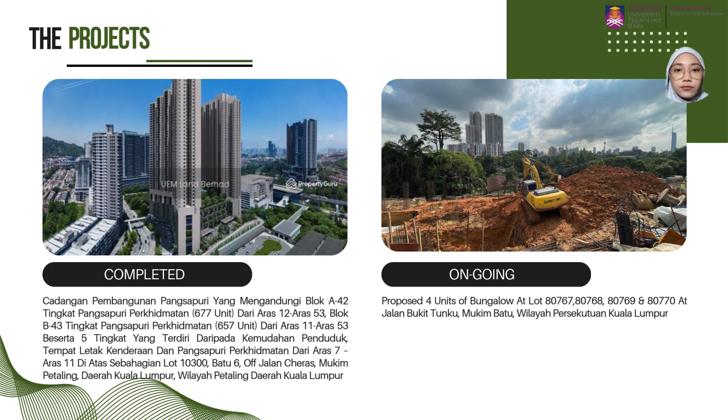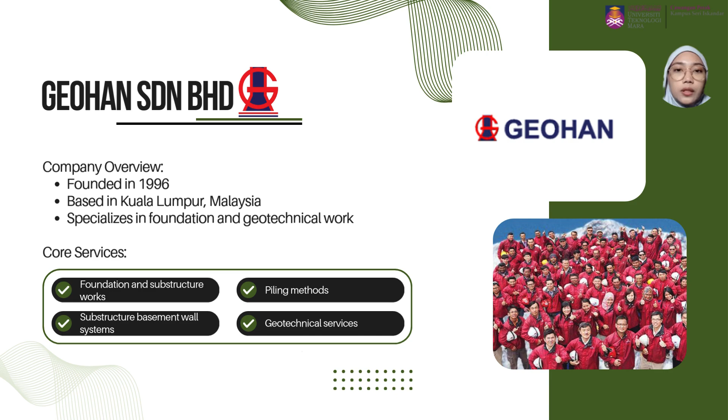Geohan Sdn Bhd was established in 1996 and is based in Kuala Lumpur, Malaysia. The company specializes in foundation and substructure works, including piling methods and basement wall systems. Their expertise lies in solving problems related to soil and ground stability, which is essential for safe and long-lasting buildings. Over the years, Geohan has completed various projects that demonstrate their technical capabilities and commitment to quality.

Let me share a recent completed project, the CTC Plot 1 project in Cheras, with a total contract sum for piling costing 39 million ringgit Malaysia. This project features two high-rise apartment blocks, Block A with 42 stories and Block B with 43 stories, both blocks offering 1,334 residential units. The unit size ranges from 42 meter square to 118 meter square, catering to different customers' needs. The development also includes 5 levels for parking, amenities and services apartment, making it a modern and convenient living space. The project was completed in 2024, designed to provide urban residents easy access to infrastructure and lifestyle facilities like MRT.

These are the parties involved in the CTC project. Geohan Sdn Bhd is the foundation and geotechnical specialist. They handled all piling and substructure works, ensuring the building's stability and durability. YHSA Sdn Bhd, as the architects, was responsible for designing a modern, functional layout suited to urban living. UEM Land Berhad, as the developers, oversaw the project's financial and operational aspects, aligning it with market demand. Local authorities ensure compliance with Kuala Lumpur's building regulations, especially given the urban location.

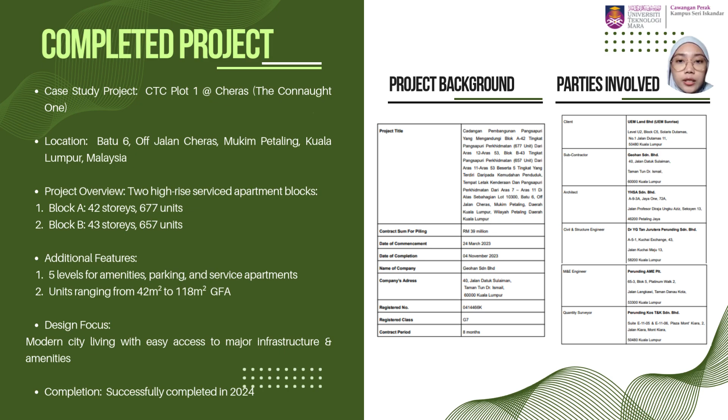Now, let's take a look at an ongoing project constructing 4 luxury villas in Bukit Tunku, with the total contract sum for piling costing 3.5 million ringgit Malaysia, one of Kuala Lumpur's most exclusive neighborhoods. This project is challenging because of the specific soil conditions at the site. Piling is crucial here to ensure the houses are built on a stable foundation. To address this, the team conducted a detailed site visit to gather data and develop appropriate solutions.

The parties involved in this project: Geohan Sdn Bhd conducted the piling work using their expertise to adapt to the challenging soil conditions. Technical CSG Engineering Consultants Sdn Bhd, as the structural engineers, designed a strong and stable framework to support the villa. Lee Chor Wah Architect focused on creating luxury designs to match the exclusivity of Bukit Tunku. Junuteras Vision Sdn Bhd, as the main contractor, oversees the construction, ensuring the use of high-quality materials and timely delivery. Local authorities monitored adherence to building codes and environmental guidelines.

Before I end my presentation, I would like to conclude that Geohan Sdn Bhd is a leader in foundation and geotechnical works, as shown by their completed project in Cheras and the ongoing Bukit Tunku project. Their innovative approach to piling ensures stability, safety, and efficiency in construction.

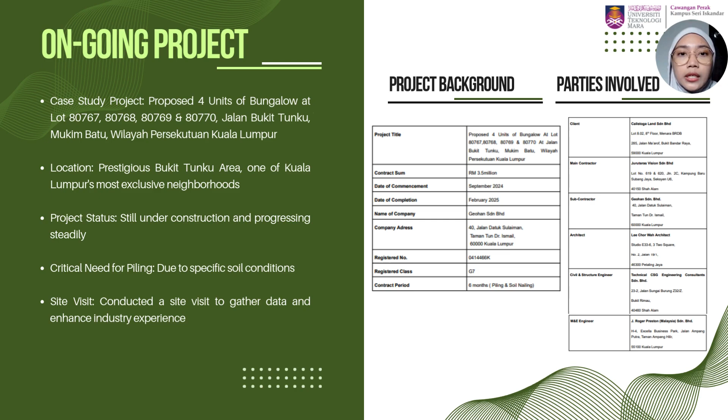For the completed project, it used bored pile for its piling. The diameter of the bored pile is 600 mm to 2500 mm and the depth of the bored pile is 12 meters, with rock socket length up to 10.4 meters, and the load capacity for the bored pile is 2400 to 55,200 Newton.

The pile distribution or total for the pile is 318 bore piles used for this project. The reinforcement bars specification for the helical bar is T10-200 for all bars. Main bar is 20 mm diameter, and main bar number per pile is 8 to 30.

For the ongoing project, micropile is used for all of the project. The diameter is 250 mm for all the piles. Depth ranges from 15.5 to 26.6 meters, and load capacities range from 250 kN to 1100 kN.

The pile distribution between the villas: there are 4 villas. Villa 1 has 59 piles, Villa 2 has 71 piles, Villa 3 has 139 piles, and Villa 4 has 142 piles.

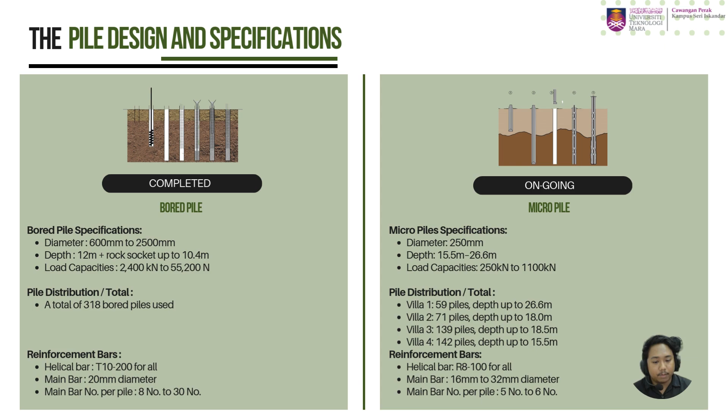Reinforcement bar for the micropile's helical bar is R8-100 for all bars. Main bar ranges from 16 mm to 32 mm diameter, and the number of main bars per pile is 5 to 6.

The equipment and resources used for the completed project comprise hydraulic boring rigs: BG30 mid series, 1 unit, and BG38 or BG36 big series, 1 unit. They also used a vibrohammer set with 5 to 7 tons capacity.

It used 4 types of excavators, some rented and some owned. The owned unit is the EX200, and the rented units are Komatsu PC300, Komatsu PC220, and Hitachi EX300. The rental price ranges from 900 to 1000 per day.

It also had a welding set, 2 sets of 500 DX rented, a bar bending machine, 1 set rented, a generator set of 20 kVA, 2 units rented, and also used crawler cranes of 50 to 80 tons, 2 units, owned by Geohan Sdn Bhd.

For the ongoing project, it used 3 units of excavator equipped with specialized attachments for drilling and handling, a compressor, 3 large compressors for air pressure based soil excavation, welding equipment, rental equipment for securing steel casing, and a pile inspection machine to ensure each pile is installed to the correct depth and alignment.

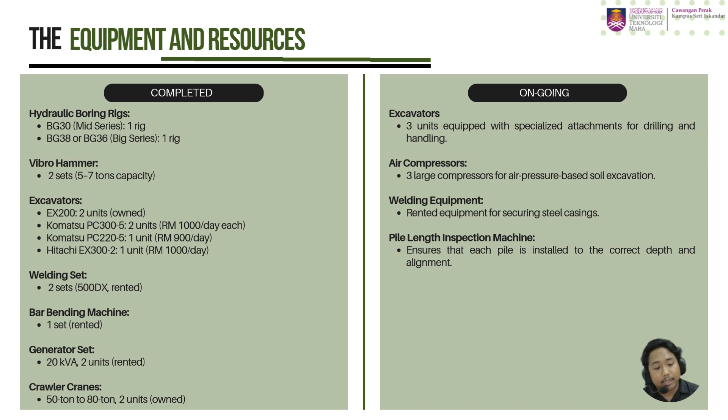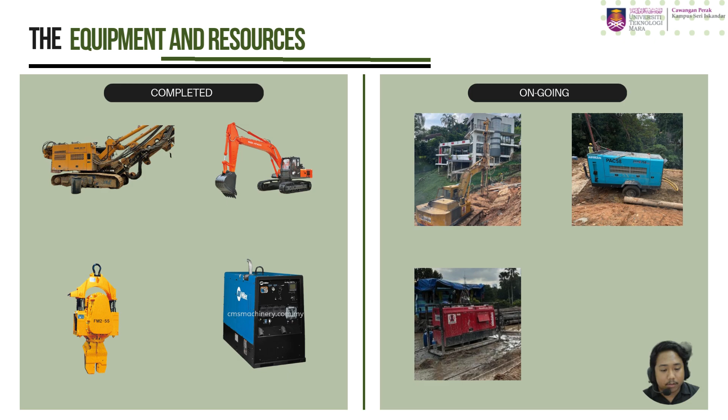For the ongoing project, we could see an excavator attached with a specialized tool for boring the holes, an air compressor used to remove the excavated soil inside the holes, and the welding unit to weld the steel casing and the reinforcement bar.

For the construction process of both projects, there is a slight similarity. So let's check it out.

For the completed project, the first step is site preparation: clear and level the site, mark borehole locations for drilling. Next is borehole drilling: use hydraulic boring rigs to drill to the required depth and insert temporary casing in unstable soil.

Reinforcement placement: place the steel reinforcement cage in the borehole to ensure structural strength. Next is concrete pouring: pour concrete into boreholes to form piles and ensure load bearing capacity. Usually we use a tremie pipe for the concrete pouring.

Final adjustment: extend reinforcement to cut off level, remove excess material, and extract temporary casing. For this project, on average, the team can complete 1 pile per day for smaller diameter piles, and up to 5 days per pile for larger diameter piles.

Next is the ongoing project. Site preparation: clear and level the site, mark borehole locations and establish access routes for machinery. Borehole drilling: drill boreholes using excavator assisted by air pressure, and install temporary steel casing to stabilize loose or collapsing soil.

Reinforcement placement: insert steel reinforcement bars into the boreholes for added structural strength. Grouting: pour cement grout into boreholes, binding the pile to the surrounding soil for enhanced stability and strength. Final adjustment: cap the piles, remove excess material, extend reinforcement to integrate with the superstructure, and extract temporary casing.

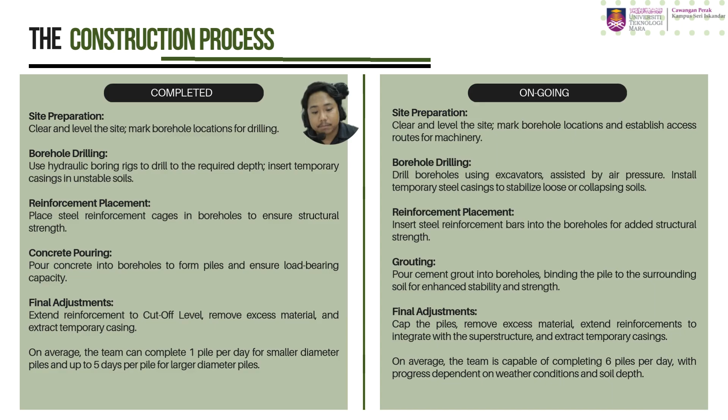The testing and quality assurance of piles for both projects is slightly different. The completed project uses an instrumented maintained load test, conducted to assess load bearing capacity under working conditions. The following piles and loads are tested: BP10 grade 45, BP09 grade 40, and BP13 grade 45.

It also uses a pile integrity test, with 11 piles tested to detect voids, cracks, or inconsistencies, ensuring structural stability. It also uses a static load test (SLT), with 11 piles tested to verify load bearing capacity and performance under static load. And lastly, a rock coring test.

It was performed on 7 piles to analyze geological condition, providing essential data on the composition and strength of the underlying rock for pile stability.

For the ongoing project, it uses only three types of tests. The first one is Pile Driving Analyzer (PDA), conducted on 8 piles. This test measures force and velocity during pile installation, assessing load bearing capacity and identifying potential flaws.

That is Maintain Load Test (MLT), applied to 10% of piles. The static load is tested over 72 hours or until it reaches 300% of the design load. The test monitors settlement to ensure the pile meets structural standards.

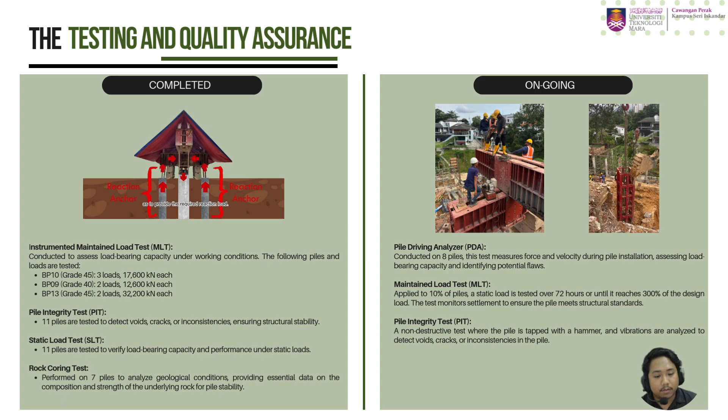Lastly, Pile Integrity Test (PIT), a non-destructive test where the pile is tapped with a hammer and vibrations are analyzed to detect voids, cracks, or inconsistency in the pile.

Hi, my name is Nuzulaika. Today I will explain the problems contractors faced during construction of piling at Taman Konat, Kuala Lumpur.

For the first problem, there is delay in site possession. Normally, delay can be caused by various reasons such as legal issues regarding land ownership status, insufficient permit approval, force majeure, and presence of squatters. This issue may affect overall project timeline and financials of the contractor due to resources such as machinery needing to be rented first. Hence, contractor needs to pay penalties for cancelling or delaying the schedule, or pay extra for how long the project is delayed.

Secondly, this project requires a VO for additional number of piles and depth of pile excavation. This may happen due to unforeseen ground conditions such as excessive groundwater table, weak soil layer, and huge depth to find hard strata. Additional piles help to transfer load uniformly.

VO requires reallocation of resources to cater to the project timeline and involves a significant amount of money. For example, increased total number of machineries and labor on site. Hence, the contractor needs to pay for the additional machineries needed and to pay wages for labor on site.

Lastly, since this project is located at the center of Kuala Lumpur, it limits the movement of large machinery and transportation of piles. Normally, piling will be supplied by either 6 meter or 12 meter lengths. So long and high load transportation is needed to transport the piles to the construction site. It can increase transportation time due to high traffic load, hence proper route planning is required.

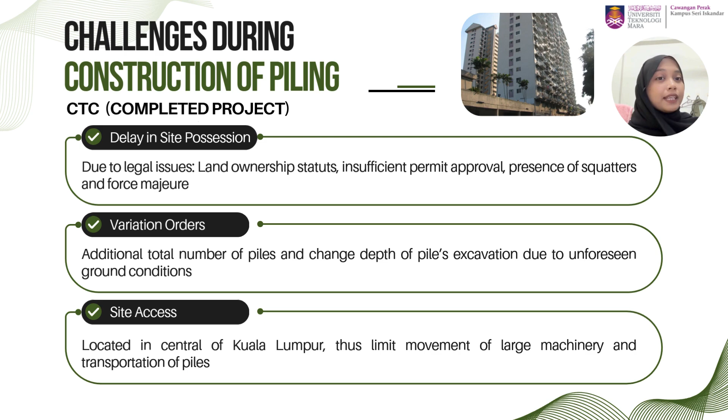For the ongoing project, Villa at Bukit Tunku, there are a few problems that arise during construction of piling. All of this information was received from the project executive and site supervisor during our site visit.

Firstly, they received complaints regarding noise pollution from the neighborhood. As we all know, construction of piling involves significant noise from its machinery. Especially for this project, it requires an air compressor due to micropiling.

Micropile involves the process of inserting casing and drilling of soil. This process produces loud sound due to the air compressor used to drill and excavate soil. This affects the neighborhood, and prolonged exposure to loud noise can lead to health issues such as stress, headache, and hearing loss.

Failure to take appropriate measures can lead to increased total cost and duration of the project, because neighbors may file complaints or lodge a police report. Hence, it increases cost for the contractor to pay summons and increases duration because the contractor may need to go through court processes.

Also, this site has uneven terrain and steep slope due to being located on a hillside. Hence, it limits space for the working area and allocation of machineries and material storage.

Also, there is high risk of accidents, especially when insufficient safety precautions are taken on site, such as not wearing PPE like safety boots. Safety boots help protect us from slippery surfaces, and reporting defects, and also maintaining a clear work area. A clear work area is important to prevent laborers from stumbling over materials on site and reduce risk of accidents.

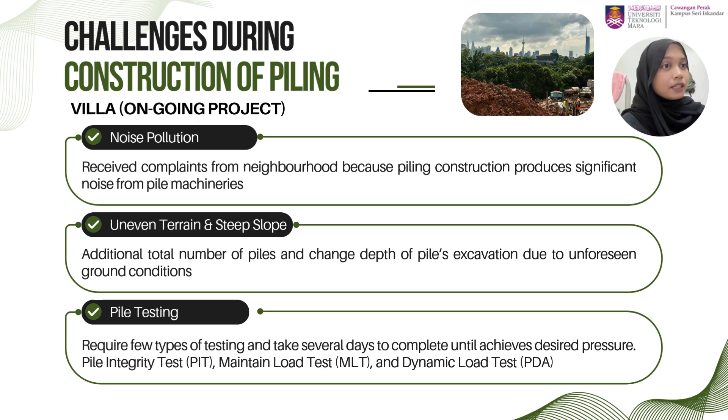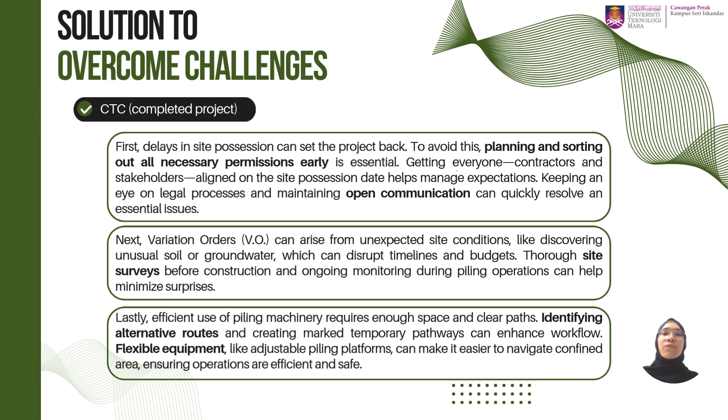Next, the solution for the Villa Bukit Tunku project. The first problem occurring from this project is noise pollution from the piling work. To avoid this, the contractor can consider building a temporary noise barrier or temporary retaining wall to reduce the noise of the piling work.

Next, the problem of narrow and steep slope areas. The solution is to build a temporary work platform to create a flat surface for the machineries, making it easier for the machineries to carry out the work and move around.

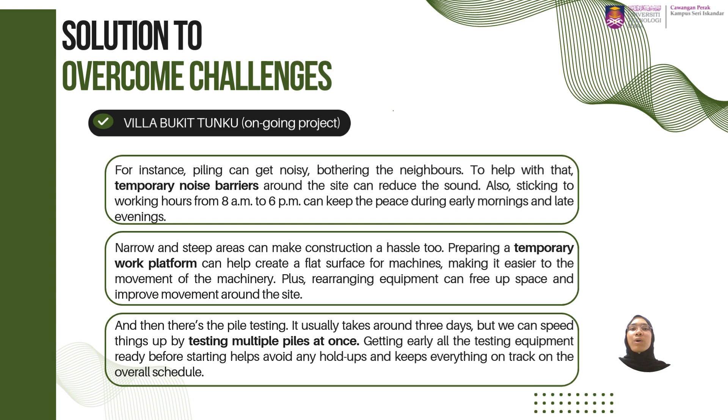Lastly, it takes a long time for pile testing. So it can speed up by testing multiple piles at one time, and also prepare all the equipment for testing in advance to keep all the work on track.

In my opinion, to overcome issues of delay in site possession, digitization of permit management can be implemented. For example, permits can be applied for online and the status of approval can also be tracked. Conducting pre-project analysis also helps prevent such delay. It needs to be done before awarding the contractor to identify potential risks that may affect site possession.

Next, real-time data integration such as BIM software can minimize the number of variation orders. So what is BIM? BIM is a technology that produces 3D design. From this 3D design, we can assess potential risks that may arise in the future. Hence, the contractor can mitigate the risk or come up with a new method of construction to overcome such risks from happening.

Also, regular training for project managers and site engineers can help enhance their skill in managing the site and improve decision-making on whether work requires a VO or not. Lastly, innovation of equipment such as hybrid piling rigs can be used instead of heavy piling machines for sites with restricted access. Also, collaboration with third parties such as companies expert in logistics and transportation can help overcome barriers to the construction site.

They help create an access strategy to transport piles to the site, especially since this site is located in a high development area and has frequent traffic congestion.

Okay, next, before this we explained the solutions and challenges for both projects. So this is the recommendation for the Villa Bukit Tunku project for future projects. First, open communication with the local community, giving information and a schedule timeline for noisy operations, which helps prevent legal issues and complaints from the local community.

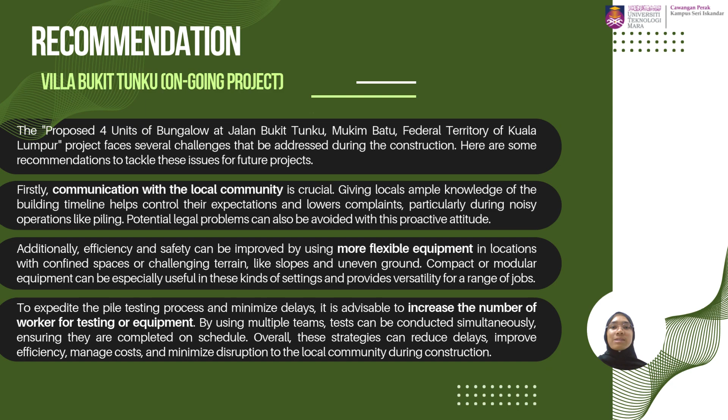Lastly, the contractor must consider increasing the number of team workers for testing work or other kinds of work, which can reduce delays, improve efficiency of the work, and minimize disruption to the local community.

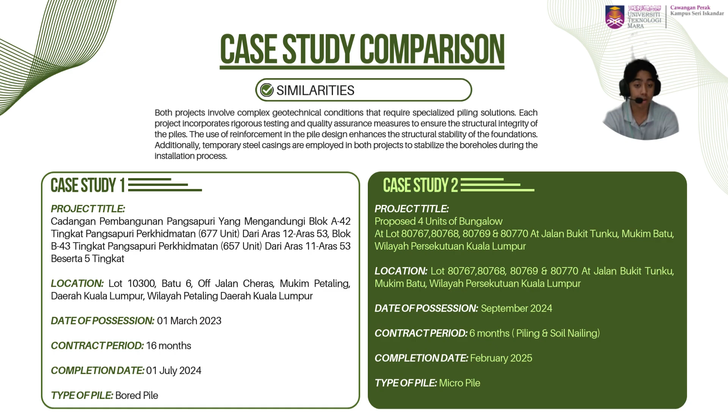For case study 1, the method of installation: Project 1's bore piling involves site preparation, borehole drilling with temporary casing, placing reinforcement bars, and pouring cement grouts. Piles are capped and connected to the superstructure with 6 piles completed daily. The project will finish in 6 months.

Comparing to project 2, micropiles are installed using hydraulic rigs, excavators, and specialized equipment. After site preparation, boreholes are drilled, debris is cleared, and steel reinforcement cages are placed before pouring concrete. Smaller piles take a day, larger ones up to 5 days, with completion set for 6 months.

The differences between these two: Project 1 uses larger diameter boreholes with deep rock sockets, while Project 2 uses micropiles with smaller diameters, ideal for confined spaces and challenging soil. So for this project, they are constructing bungalows, so it's more suitable to use micropiles.

Problems and solutions: for bore piles, the CTC project faced delays in site possession, variation orders due to unforeseen ground conditions, and logistical challenges with machineries in a dense urban area. Solutions for this include better pre-construction planning through site surveys and improved logistics to minimize delays and optimize resources.

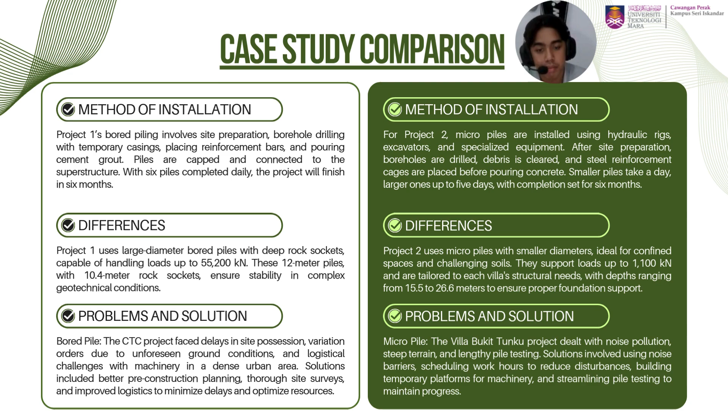Continuing on effectiveness and efficiency, starting from Project 1, the use of bore pile proved highly effective in handling large loads, providing stability in complex soil conditions. The pile diameters are customized, allowing for tailored solutions to meet specific structural demands. This installation process involves precise work using advanced equipment, but larger piles can take up to 5 days to complete.

As for Project 2, the micropile system is effective because it works well in tight spaces and on difficult soils, providing strong, stable foundations. It's efficient since it causes less noise and vibration, speeds up construction, and minimizes impact on nearby areas. You can imagine using bore piles in a crowded, small area—it's going to be very loud, it's going to be very messy.

Lastly, for our comparison, we will talk about cost analysis. Project 1 has a total cost of 39 million, which covers high-grade materials, skilled labor, advanced machineries, and testing. The project involves significant investment in premium materials to meet high load requirements, while costs for labor and equipment are balanced through the use of advanced machineries and skilled personnel to ensure precise performance.

As for project 2, it has a total cost of 3.5 million, including expenses for material, labor, equipment rentals, and testing. The focus is on material optimization, particularly in minimizing waste and optimizing cement usage for cost efficiency, while smaller machinery helps reduce rental expenses and streamline installation, contributing to overall cost savings.

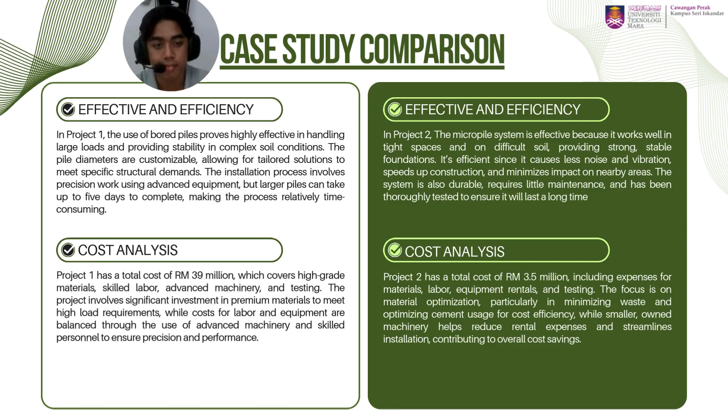To summarize, the first project used bore pile design for high load capacities. It faced challenges such as delays in site possession, unforeseen ground conditions, and logistic issues in busy urban conditions. These were resolved through detailed planning, advanced site surveys, and improved logistics.

The second project, Villa Bukit Tunku, used micropiles suitable for limited spaces and steep terrains. The challenges include noise pollution, difficult topography, and time-consuming pile testing. Solutions like noise barriers, temporary platforms, and streamlined testing helped overcome these challenges.

In conclusion, bore piles are ideal for large, heavy structures, while micropiles are better for constrained and uneven sites. The key takeaway is that advanced planning, innovative technology, and effective communication are critical for overcoming construction challenges. Thank you.